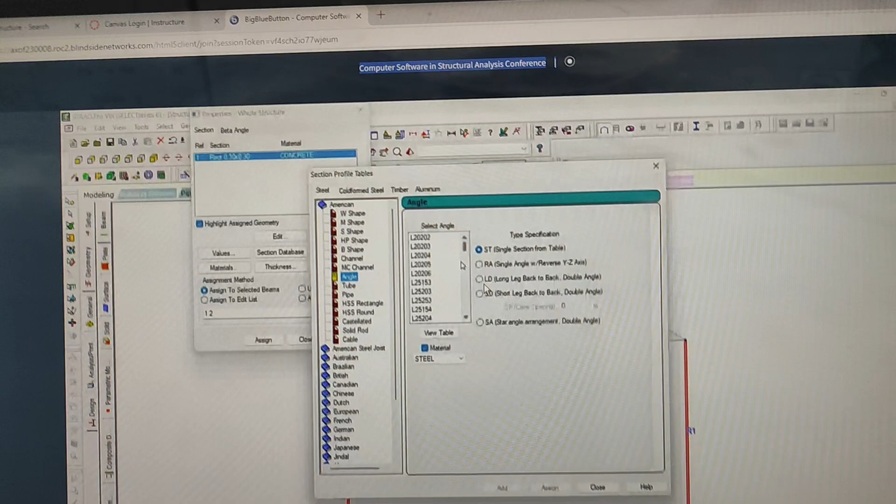20, and 4. So, ito yung 2 by 2 by 1/4. Pag meron kang nakita 25, 20, and 4, it means that is 2 and 1/2. Yung susunod na 5, that is 1/2. Then, ito naman, 2 and 0, that means 2 inches yan. So, yung 4 naman, yung thickness naman yan.

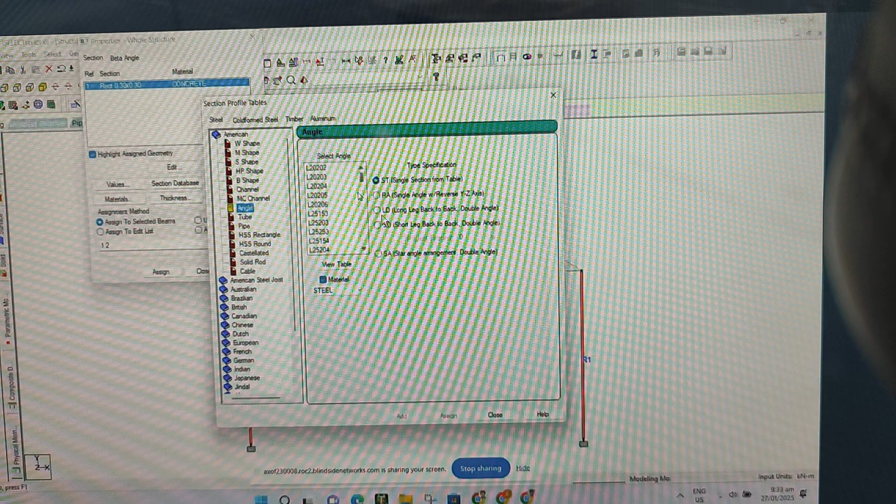And that is 4/16. So, 4/16 ang designation niya dito. Ang divisor niya doon is 16. So, what is 4/16? That is 1/4. Kaya ang isaselect natin is this one. L20204, so it means that that is 2 by 2 by 1/4. Okay, so, select na natin ito, 2 by 2 by 1/4. Okay, so, ayan. I-check natin.

Then, meron tayong type of specification. So, we have ST, that is single section from the table. Then, the other one is RA, single angle with reverse YZ axis. Then, yung isa naman, that is LD, long leg back to back. So, ayan naman, pareho lang tayo ng leg. Okay, done.

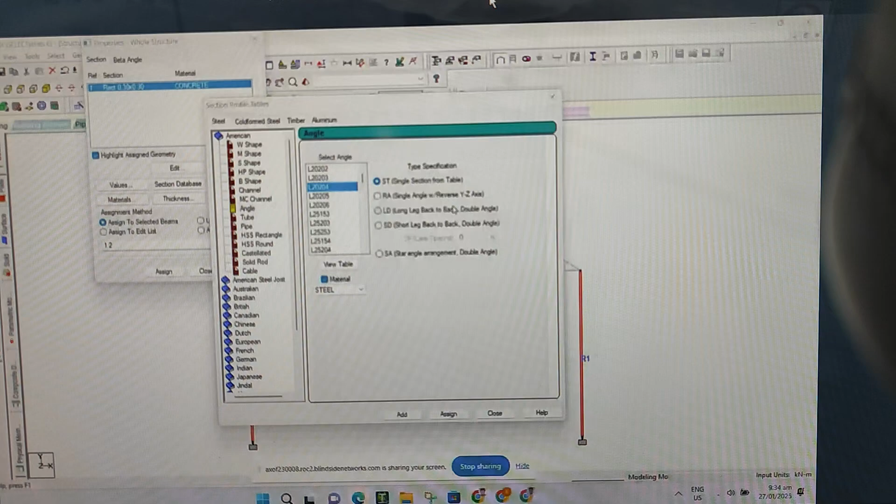Okay, so, yung angle natin na 2 by 2 by 1/4, pareho lang sila ng leg. Kaya either pwede yung LD or SD. So yung SD naman, that is short leg back to back. So kahit saan dito pwede, kasi yung angle natin is pareho lang yung leg niya. Okay, so click natin yung LD or long leg back to back. Tapos mayroon kang clear spacing.

So, ang clear spacing naman natin, ganyan yan. Pag meron kang space dito, so that is provided for the clear spacing. So, halimbawa, gumamit ka ng gusset plate. So, ipro-provide mo ngayon yung thickness ng gusset plate. Pero pag wala kang gusset plate, then ang ilalagay natin na clear spacing is 0. So, ito naka-default na 0. So, therefore, i-add natin yan. Then, add.

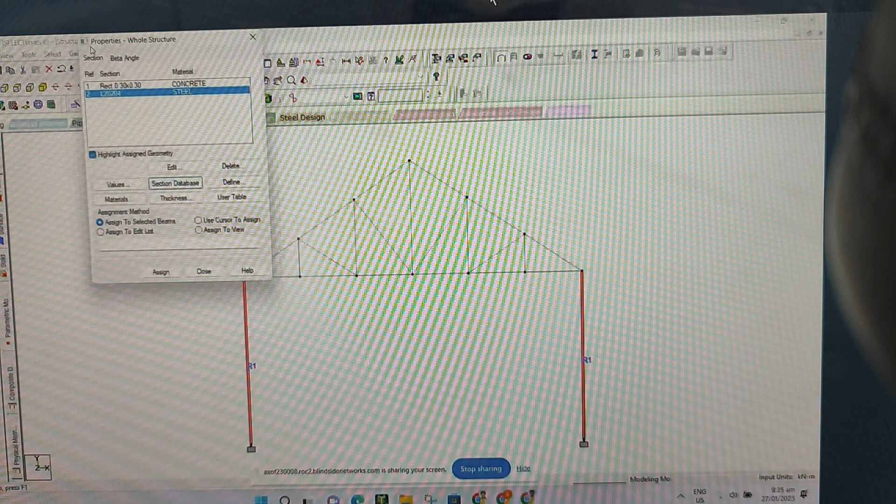Okay, so, naka-add na. Then, select natin yung mga member natin na steel. So, yan na yung mga member natin na steel. Then, nakaselect din yung L20204 steel. So, assign.

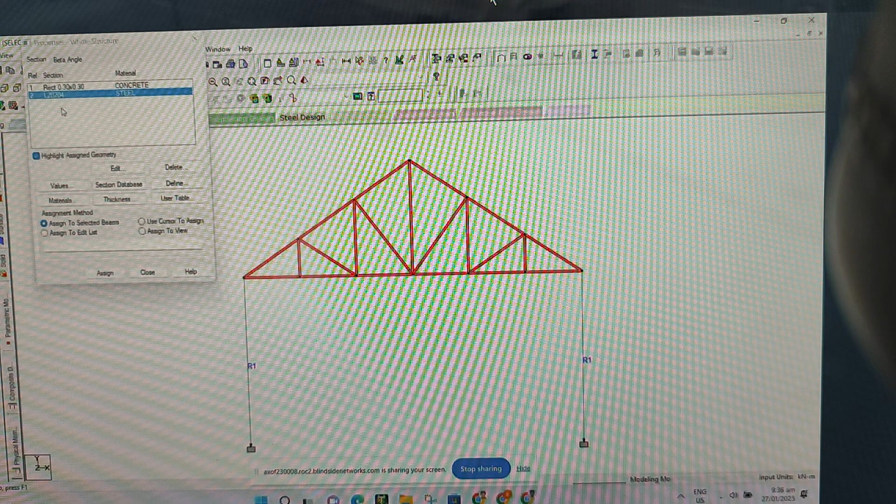Okay, pwede naman natin tingnan kung tama yung section natin. Ayan. Yung section natin, dalawang angle bar. So, you can see here na dalawa yan. Kasi pag isa lang yung kinuha mo, then ang lalabas doon is isa lang ito. Okay, so, in that case, mali?

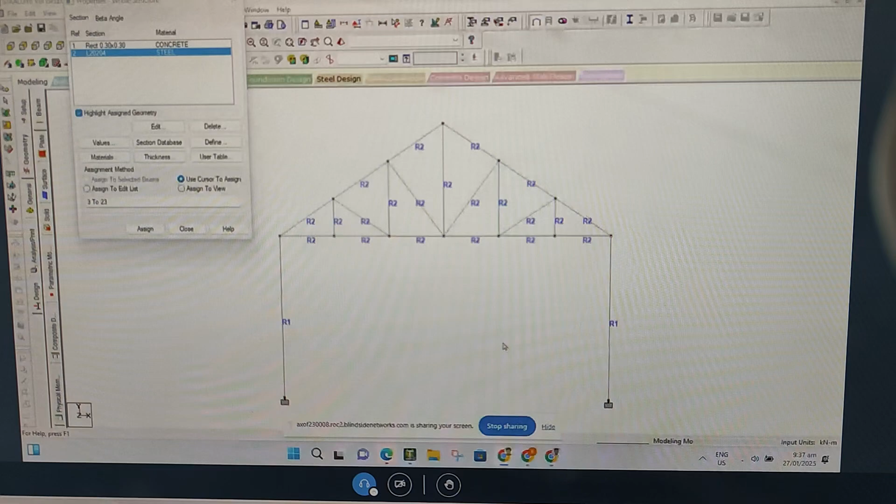Then, from that, meron pa tayong isa. So, meron pa tayong steel truss which is a 4x2. So, purlins yan. So, therefore, mag-add din tayo dito ng purlins. So, check ang section database. Yan, lumabas na yung mga channel. So, check ang channel.

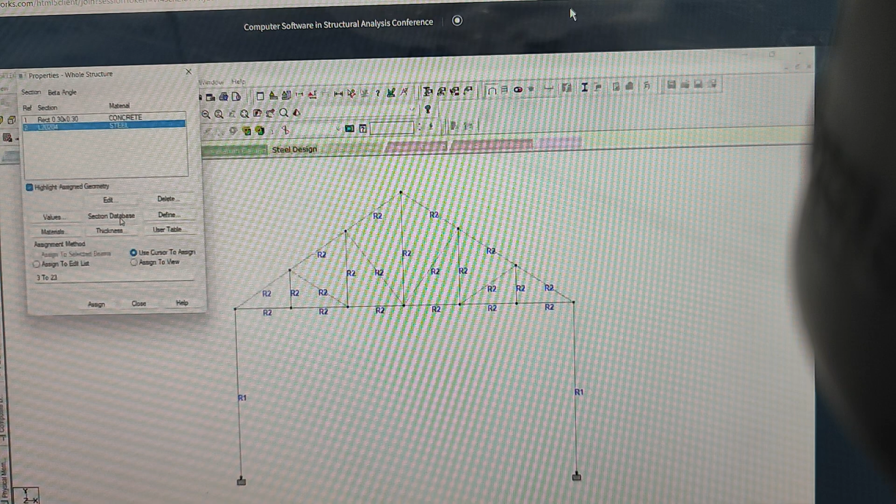Then, dito ngayon, check natin kung anong channel yan. That is 4x2. Okay, 4x2. So, I think we have to see yung mga section natin. So, to be able to see the section, i-click natin yung view table. Yan, lumabas na yung view table natin dito. So, yan yung depth. We have the depth and the width of the flange. So, ganyan yung channel. So, we have here the depth.

Then, ito, that is the width of the flange. Ang symbol niya is BF. So, ito naman, that is thickness of the flange. Ang symbol is TF. Then ito, that is the thickness of the web. So, TW. So, lahat yan meron tayong mga properties.

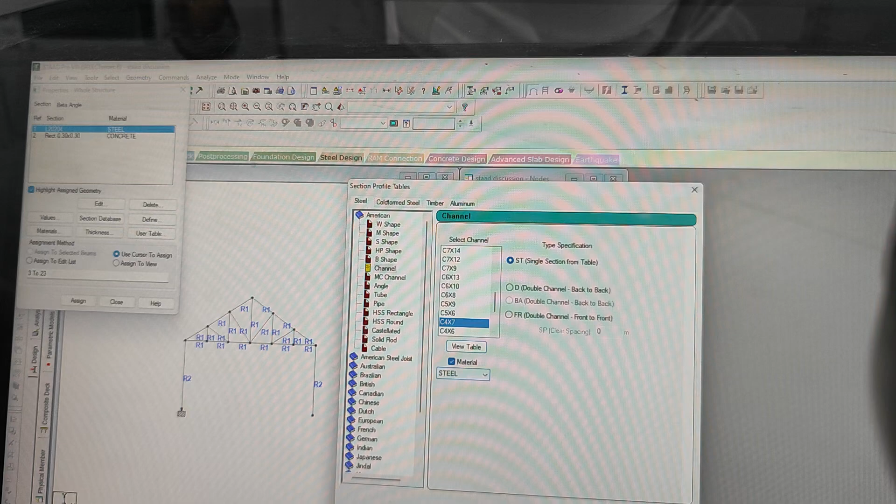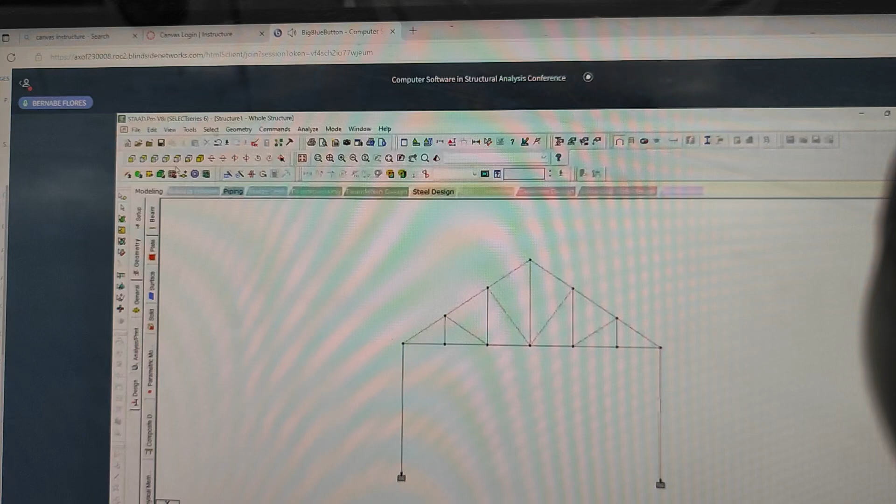Okay, so since we have already selected the materials, pwede na natin... Okay, so kanina naka-view from Z, positive Z tayo. Then let's take a view from positive Y. So view from positive Y. Then highlight ulit natin yung mga members, lahat yung members. I-highlight natin.

Tapos, i-click natin itong translational repeat. Okay, so click on translational repeat. Then we have here now the global X direction, Y direction, and Z direction. So, andito yung step niya, with the step in meters and the number of steps. So, we need 2 steps. Dalawang step tayo. By the way, yung distance pala natin dito is considered 4 meters ito.

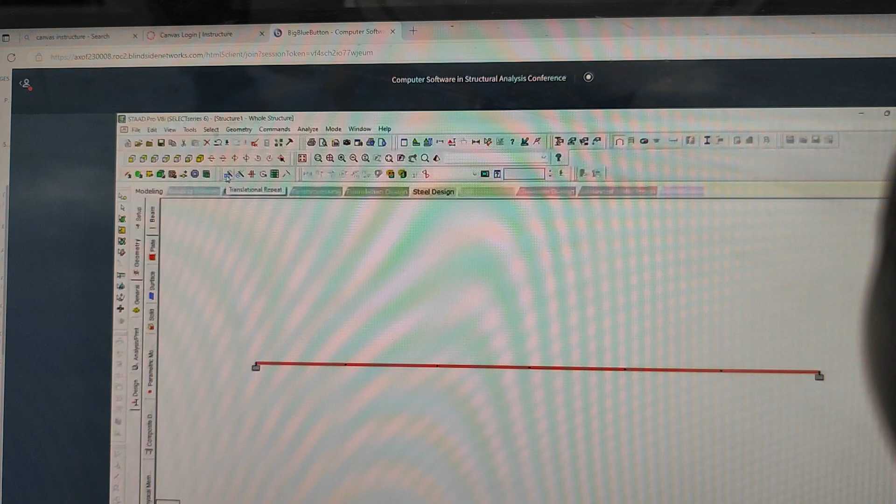So, we need 2 steps. Pwedeng backward step or forward step. So, forward na lang tayo. So, we need 2 steps, 1 and 2. And the spacing there is 4 meters. So, yan yung pagkakaan natin. Okay, so meron na.

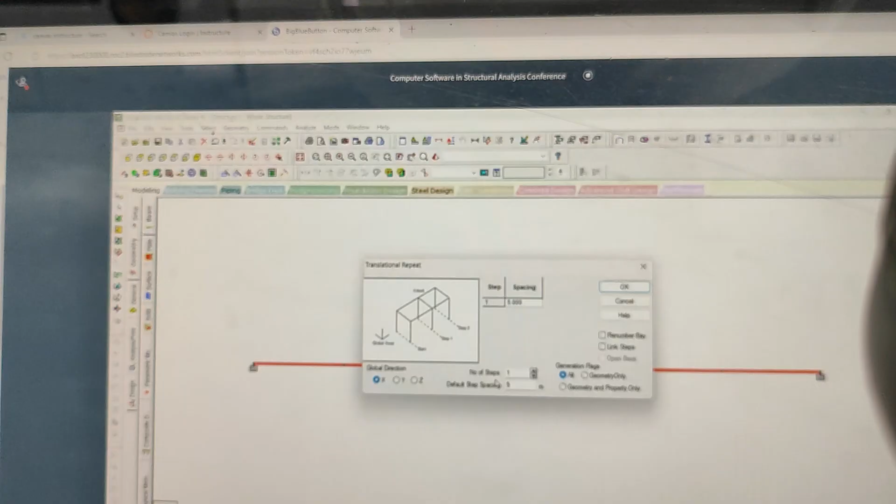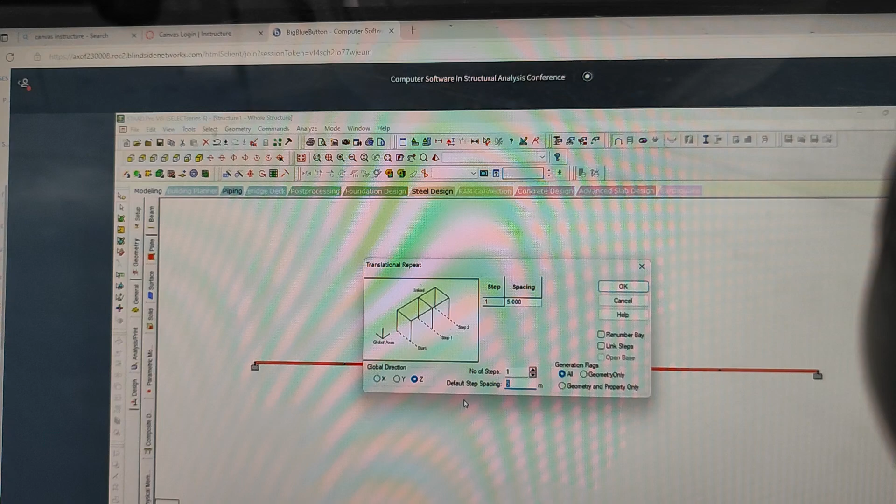So, ang gagawin natin ngayon is Z tayo, Z step, kasi yung orientation natin ng XYZ, Z yung pupuntahan natin. So, positive Z tayo. Okay, so i-click mo yung Z, then yung step that is 4 meters. Then number of steps, dalawa. Tapos, meron kang linked steps dito. So, check ang link steps. Then, i-check din natin itong open base. So, naka-open base na. So, after that, i-okay natin yun.

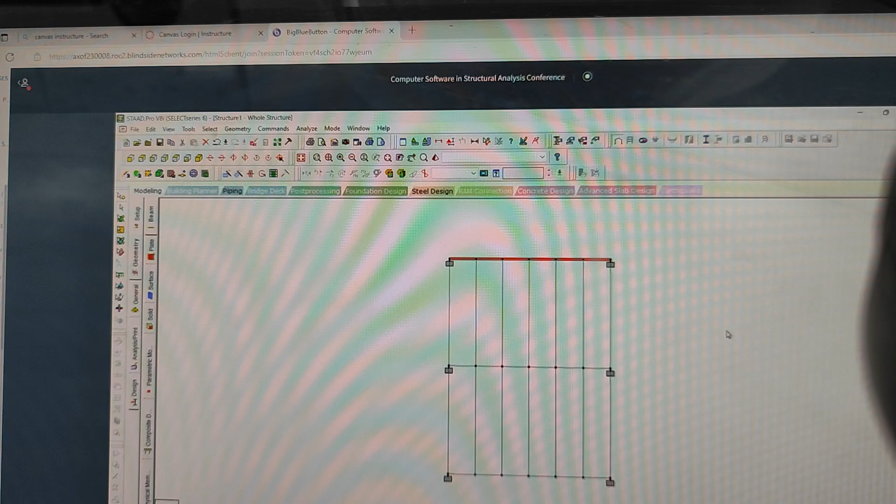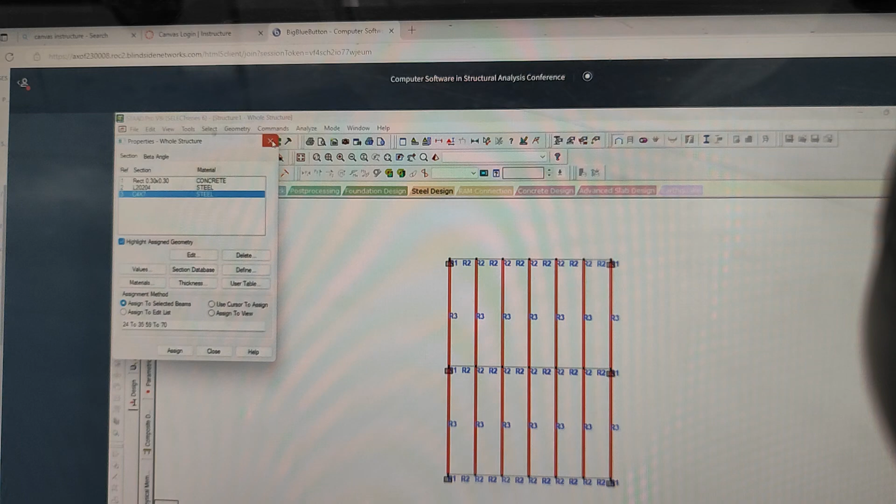Okay, so we have now the purlins natin, this one. Ito yung mga purlins natin. So, highlight natin yung purlins. Then, we go on purlins. Okay, so, maganda. Highlight natin, then assign. Okay, we can see now the figure on that. Pero wala naman tayong member sa baba. So wala tayong member sa baba.

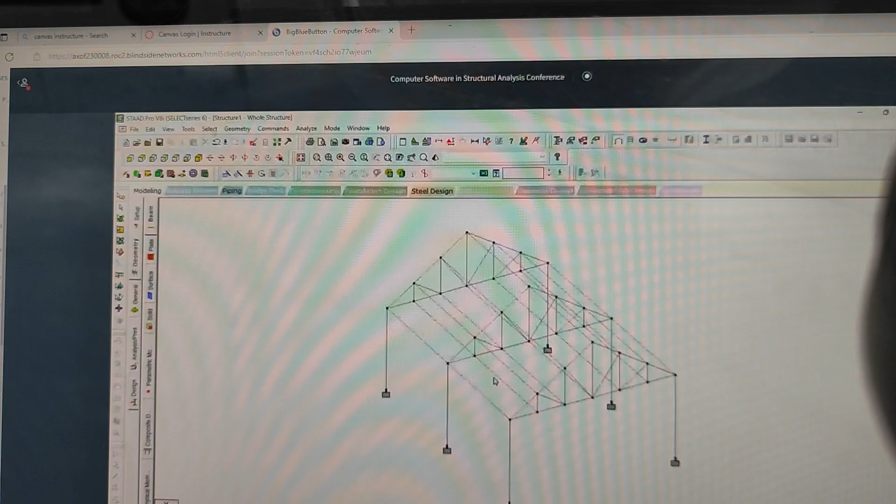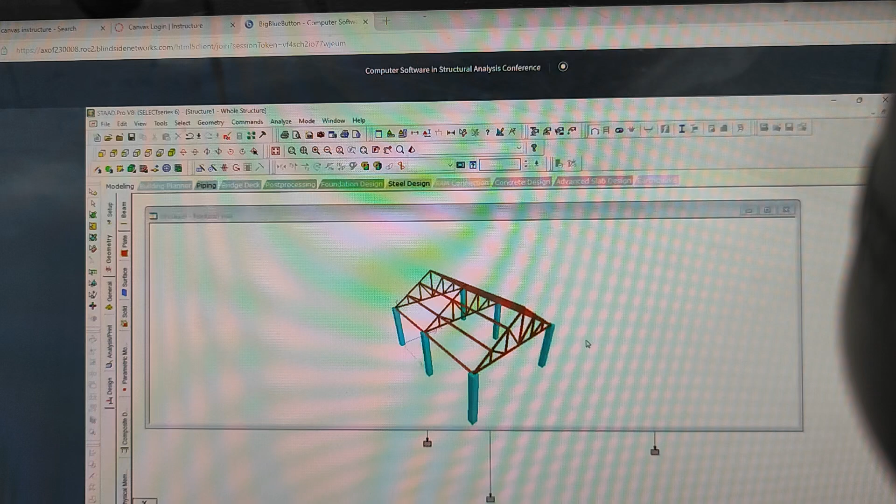So therefore, tanggalin natin ito. Okay, so tanggalin natin yan. Then, pwedeng delete. So, delete natin, then, okay. So, ayan na rin yung truss natin. So, pwede natin tingnan kung ano yung mga section na ginamit. So, yan yung truss natin, the truss, at saka yung column natin. Okay, so, kulang na lang dito is yung design, yung analysis. But before the analysis, kailangan muna natin yung loading.

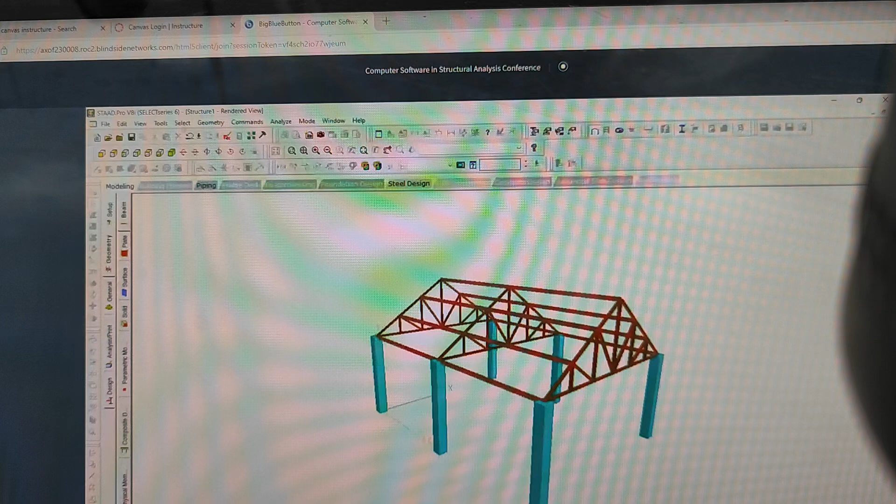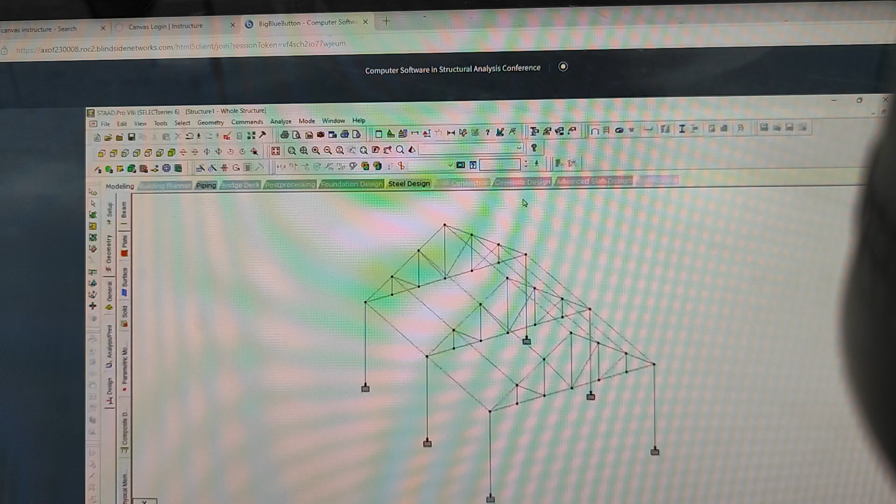Okay, so in the loading, meron tayong wind load. So take note ng wind load. Meron tayong wind load dito. Ayan, wind load. So yan yung uunahin natin, yung wind load. Okay, so pupunta ka sa command, then loading. Then definition. So last time ang ginamit natin is primary load, kasi yung frame natin doon, that is just 2D. Pag 2D ka, yung primary load yung gagamitin mo. But when you are in frame, kailangan mong gamitin ito, definition.

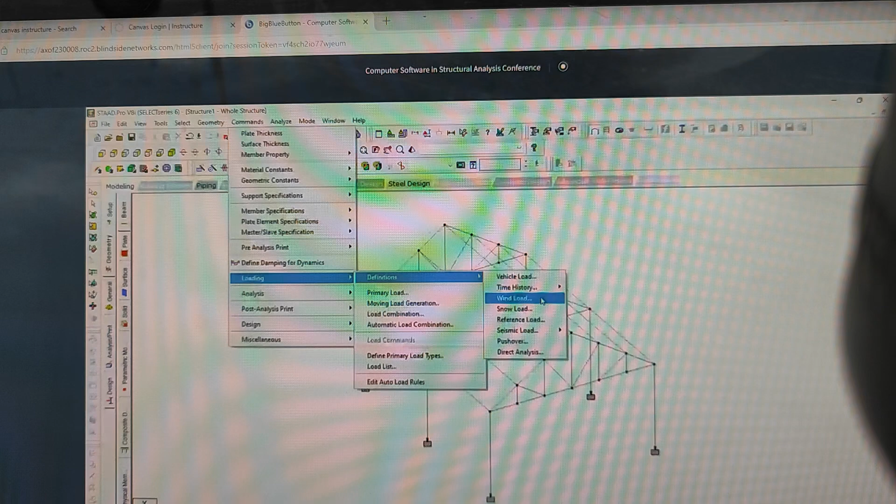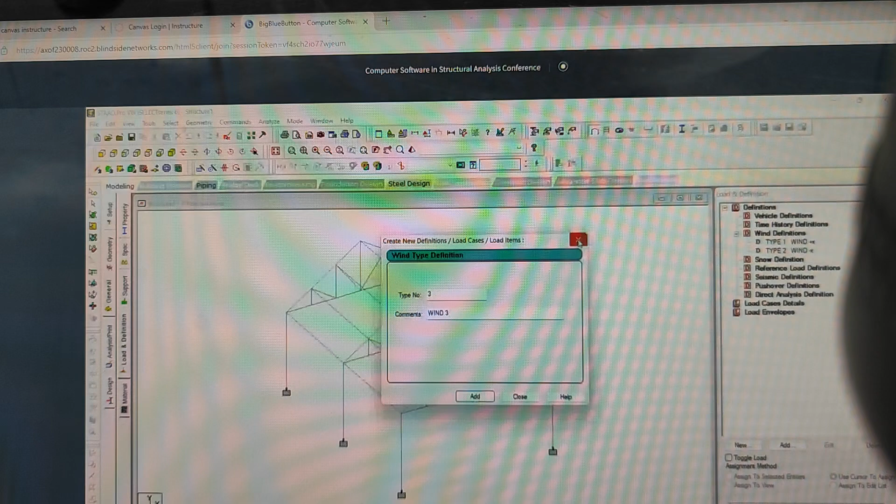So we have vehicle load. So alam natin na yung vehicle load, that is for bridge analysis. Then, meron tayong wind load. So ito yung wind load natin. Then type number 1, wind load number 1. Okay, so palitan natin ito, wind load from positive X. So, positive X, then add. Yung isa naman, that is from negative X, then add. Okay, so on the wind load, mag-add tayo ngayon. I-check mo lang yung wind load, type of wind, then mag-add ka. Add.

Then, basic wind speed. Okay, palitan natin kilometers per hour. Procedure, buildings. Wind zone number 2. Nakalimutan ko na kung ano yung basic wind speed in terms of kilometers per hour. Siguro mga 78. Okay, so palitan natin ng 78. Exposure B. Building structures, chimney tanks, solid signs, open signs, lattice frameworks, truss tower. So that is building structure. Consider wind speed up over hills or escarpment. Considering na located on flat area, walang escarpment. So, no lang yung default niya dito, then apply.

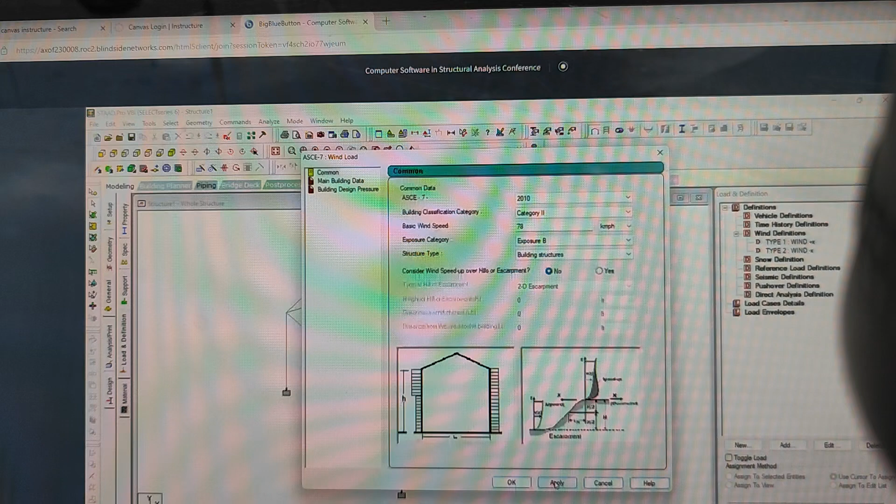Okay, main data, building height. So, palitan natin, that is 3 meters. Building length along the direction of wind, in meters. Yan yung direction ng wind natin. So, the length there is 6 meters. Then, building length normal to direction of the wind. Normal is ito, 8 meters. So, 8. Wag na ito, building natural frequency.